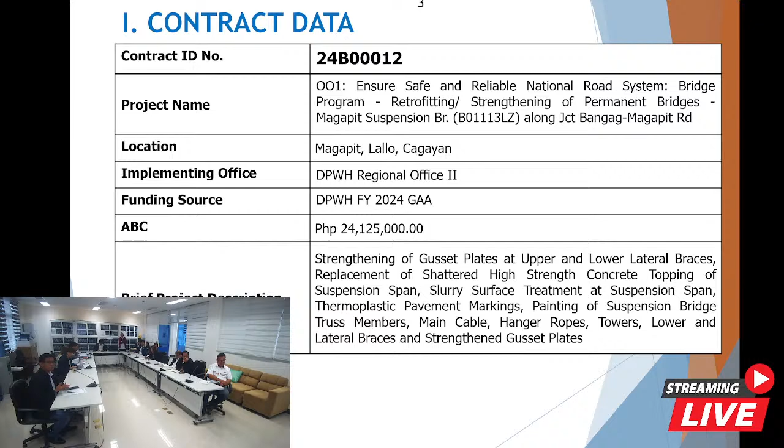As to the scope of works, for the facilities of the engineer, we have the provision on rental basis, the operation and maintenance of combined field, office, laboratory, and living quarters building for the engineer, provision of furniture, fixtures, equipment, and appliances for the field office of the engineer, provision on rental basis of 4x2 pickup type service vehicle of the engineer, and operation and maintenance of the 4x2 pickup type service vehicle of the engineer.

With regards to the other general requirements, we have the project billboard or signboard, occupational safety and health program, traffic management, mobilization and demobilization, and environmental management and monitoring. For the earthworks, we have the removal of structures and obstruction of steel, concrete, and other actual structures.

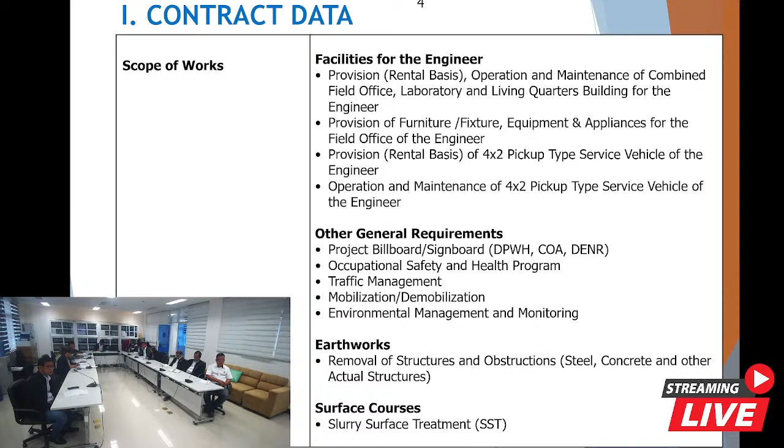For the surface courses, we have slurry surface treatment, or SST. For the bridge construction, the scope of work is furnishing, fabrication, erection of structural steel grade 36 and 50, painting of structural steel, bolts with nuts and washers, structural concrete, 41 megapascal non-shrink, and forms and false works. For the miscellaneous structures, we have the reflectorized thermoplastic pavement markings, white and yellow, and waterproofing on deck slab using epoxy base. The contract duration is 231 calendar days, inclusive of the net working days, predetermined unworkable days, Sundays, and holidays.

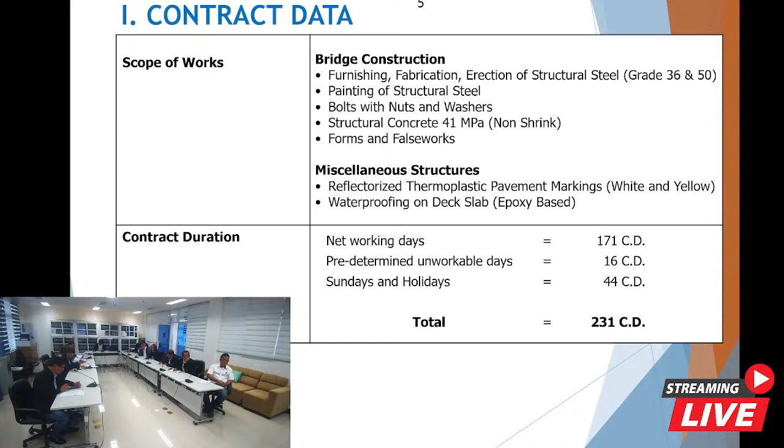As for the eligibility requirements, the PCAB license size range should be at least Small B. And for the SLCC, bidders should have completed a contract on major category of work with construction costs of at least 50% of the ABC, which is 12,062,500 pesos of the contract to be bid.

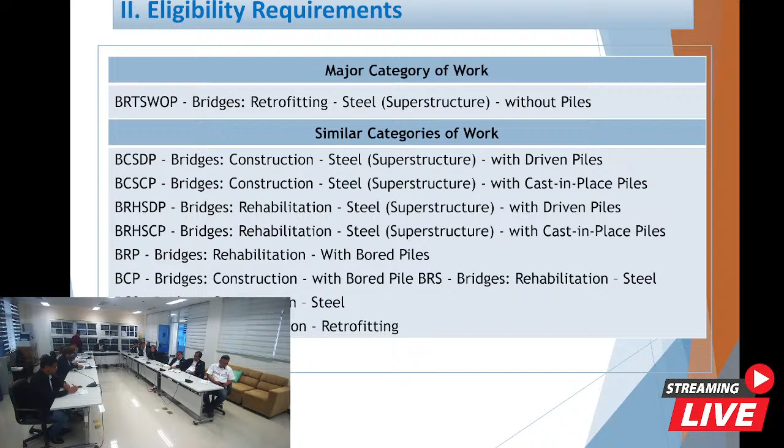For the eligibility requirements under major category of works: BRTSWOP, bridges retrofitting steel superstructure without piles. For similar categories of work: BCSDP, bridges construction steel superstructure with driven piles; BCSCP, bridges construction steel superstructure with cast-in-place piles; BRHSDP, bridges rehabilitation of steel superstructure with driven piles; BRHSCP, bridges rehabilitation of steel superstructure with cast-in-place piles; BRP, bridges rehabilitation with bored piles; BCP, bridges construction with bored piles; BRS, bridges rehabilitation steel; BCS, bridges construction of steel; BRR, bridges rehabilitation retrofitting.

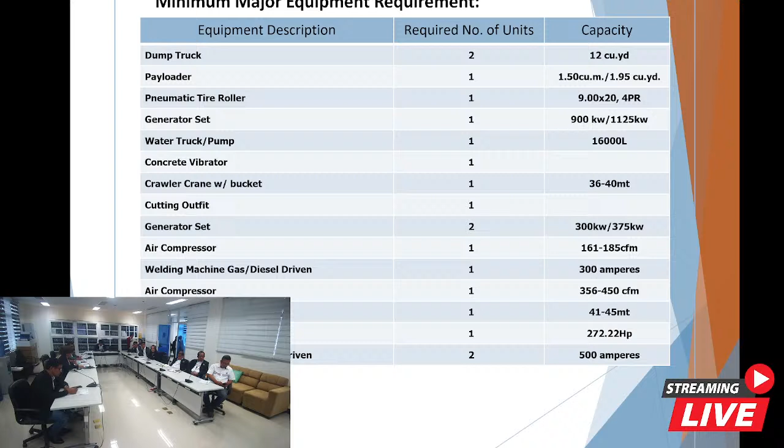For the project requirements, under the work experience requirements for the key personnel, please refer to the bid data sheet, as well as the minimum major equipment requirement. Please refer to the bid data sheet.

That's all, Vice Chair. Okay, thank you, Cecil. So, any question or point of clarification from the other members of the council?

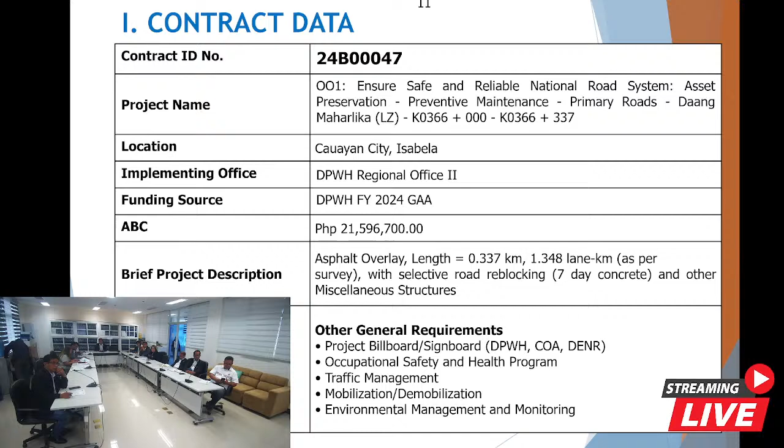For earthworks, we have removal of actual structures, obstruction, PCCP with a thickness of 0.23 meter and 0.30 meter, excavation, surplus common, and sub-grade preparation.

For sub-base and base course, we have aggregate base course, polymer stabilized sub-base, base surface course. For surface course, we have asphalt overlay, PCCP with a thickness of 0.3 meter, 7-day concrete.

For miscellaneous structures, we have signs, warning and traffic instruction, internally illuminated pavement level marker, stud flush type, bi-directional reflectorized thermoplastic pavement markings, white and yellow, structural concrete injection and crack repair.

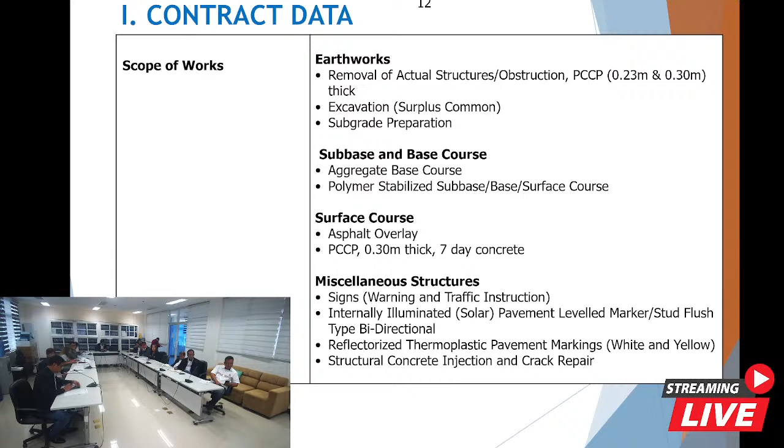For contract duration, with a total of 81 calendar days.

For the eligibility requirements, for PCAB license must be at least small B. For SLCC, bidder should have completed a contract on major category of works with a construction cost of at least 50% of the ABC, which is 10,798,350 pesos of the contract to be bid.

For the major category of work, RCA, roads construction asphalt. For similar categories of work, RRA, roads rehabilitation asphalt. For the project requirements, work experience requirements for the key personnel, please refer to the bid data sheet. Likewise with the minimum major equipment requirement.

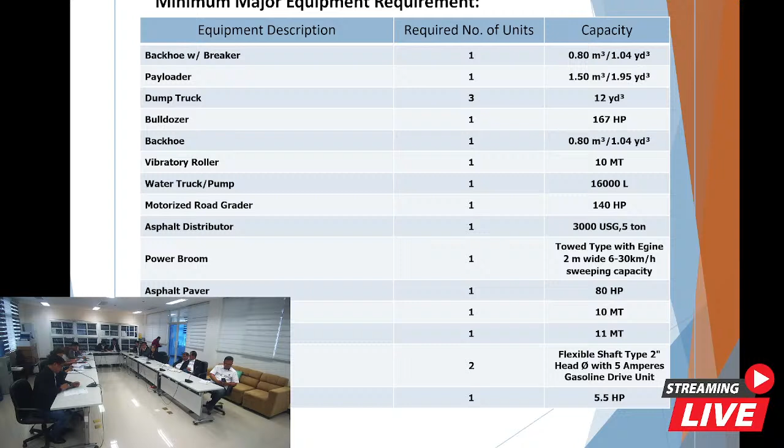That's all, Mr. Vice Chair. Okay, thank you, Ma'am Rose. Any question for that particular contract, 24B0047?

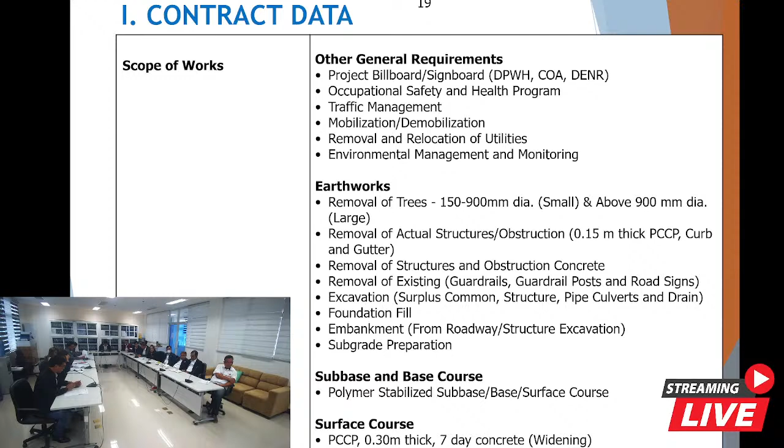Road bridge construction: reinforcing steel grade 60, structural concrete 20.68 megapascal for 14 days, structural concrete 27.58 megapascal for 28 days, reinforcing steel bars grade 40, lean concrete class B 16.5 megapascal.

For drainage and slope protection structures, we have pipe culvert class 4 RCPC with 910 mm diameter, 1,220 mm diameter, and 1,520 mm diameter. Metal frames and covers, metal frames and gratings, and grouted riprap, class A.

Miscellaneous structures cast in place, that is concrete curb and gutter. For signs, we have warning, regulatory, and traffic instruction signs. For hazard markers, that is chevron signs. For trees, furnishing and transplanting.

Reflectorized thermoplastic pavement markings for white and yellow, and reflectorized thermoplastic rumble strip.

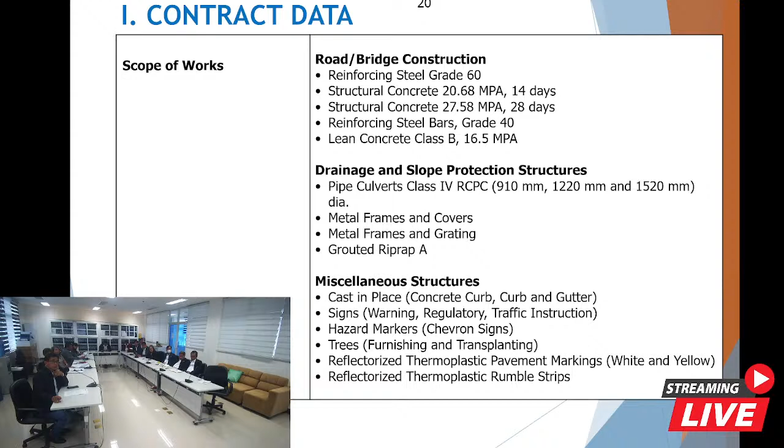The contract duration: net working days is 235 calendar days, predetermined unworkable days 22 calendar days, Sundays and holidays 60 days, for a total of 317 calendar days.

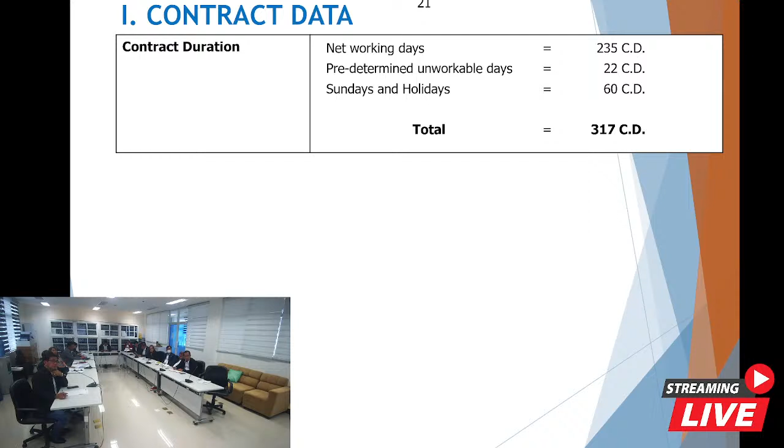PCAB license: required PCAB license is size range of at least Medium B.

As SLCC, bidders should have completed a contract with a major category of works with a construction cost of at least 50% of the ABC, or equivalent to 77,293,935.71 of the contract to be bid.

For the major category of works: RCP, roads construction, and PCCP. For similar categories of work: RRP, road rehabilitation, PCCP. RCTP, that is roads construction tunnel PCCP.

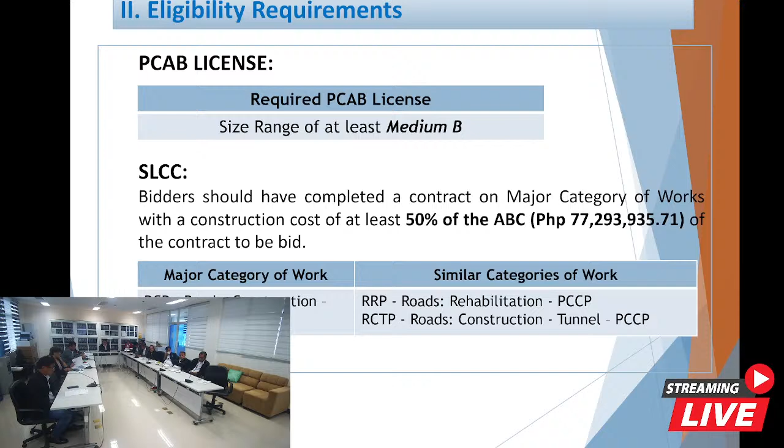For work experience requirements for the key personnel: for project manager, at least 5 minimum years of total work experience in position, and 5 minimum years of similar experience in position.

For project engineer, 5 minimum years of total work experience in position, and 3 minimum years of similar experience in position. For materials engineer, he must be an accredited materials engineer II.

For quantity engineer or surveyor, at least 3 minimum years of total work experience in position, and 2 minimum years of similar experience in position.

For foreman, at least 5 minimum years of total work experience in position, and 3 minimum years of similar experience in position. Safety officer must be accredited by DOLE.

Pollution control officer must have a certificate of training issued by an EMB recognized organization. Note: materials engineer's assignment must be compliant to DPWH Department Order Number 98, Series of 2016, revised guidelines on the accreditation of contractors' consultant materials engineer.

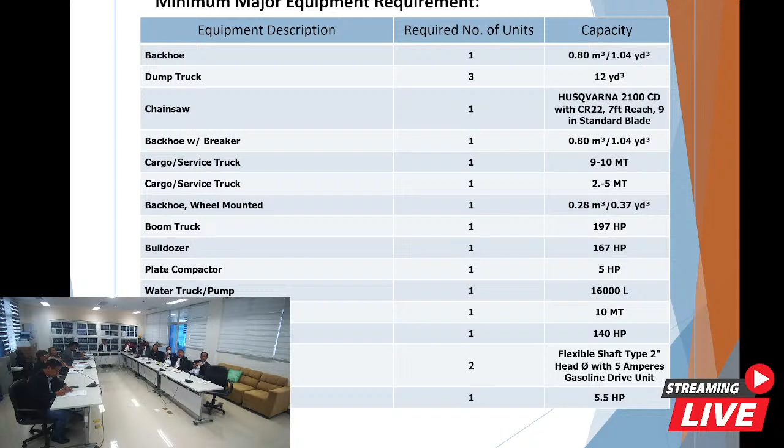For the minimum major equipment requirements, please refer to the bid data sheet. And the list of materials and equipment must be in accordance with Department Order Number 11, Series of 2017.

That's all, Vice Chair. Okay, thank you, Mr. Bernard. So, any question for that particular contract?

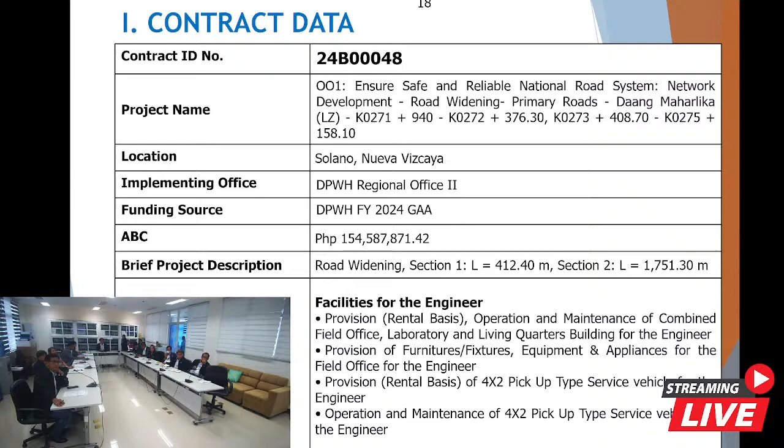So we have the provision for 4x2 pickup, this type pickup on rental basis. This is likewise brand new. Should be brand new.

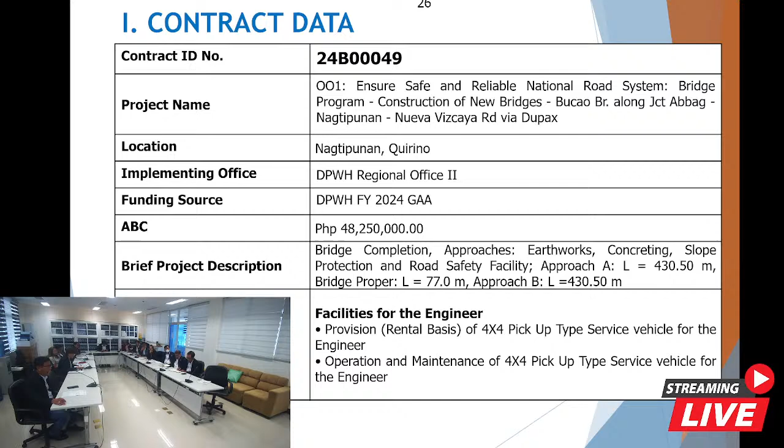With respect to the scope of work under the facilities of the engineer, there will be a provision on rental basis of a 4x4 pick-up type service vehicle for the engineer, and operation and maintenance of the 4x4 pick-up type service vehicle for the engineer. This is brand new, and it's 4x4 because it's located in a mountainous area.

For the items of work under the general requirements, we have project billboards and signboards for DPWH, COA, and DENR, occupational safety and health program, traffic management, mobilization and demobilization, and environmental management and monitoring. For earthworks, the items of work under this is the removal of actual structures and obstruction of PCCP and RCPC,

removal of structures and obstruction concrete, excavation of structures, foundation fill, shoring, cribbing, and related works, shoring, embankment from roadway, structure excavation and borrow, and sub-grade preparation. For sub-base and base course, we have aggregate sub-base course, while for surface courses, we have slurry surface treatment and PCCP of thickness 0.15 meters and 0.28 meters thick.

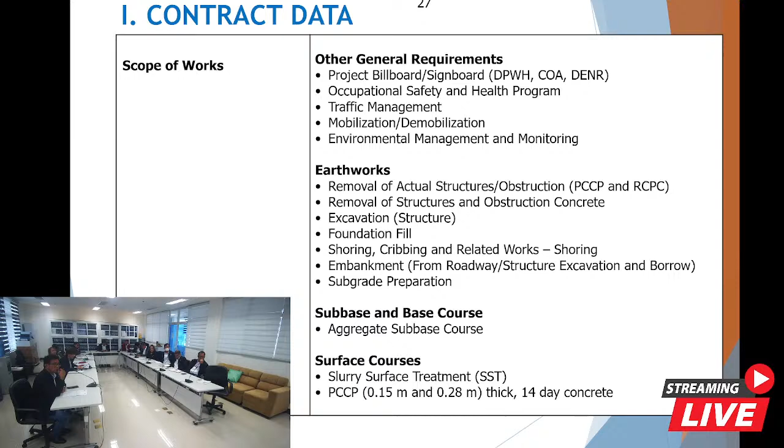It's a 14-day concrete. Under the roads and bridge construction, the items of work are concrete piles cast in drilled holes of 1.4 meter diameter, permanent casing 1.4 meter diameter 10 mm thick, concrete railing, pile integrity testing, low strain, high strain dynamic testing, bolts with nuts and washers, reinforcing steel grade 40 and 60 for bridge, structural concrete 20.68 megapascal class A 14 days, structural concrete 20.68 and 27.58 megapascals for class A 28 days, structural concrete, painting works,

reinforcing steel bars grade 40, clean concrete class B 16.5 megapascals, paint, pre-molded expansion joint filler with sealant of 12 mm. For drainage and slope protection structures, we have rubble concrete, hand laid rock embankment, drain pipe, galvanized.

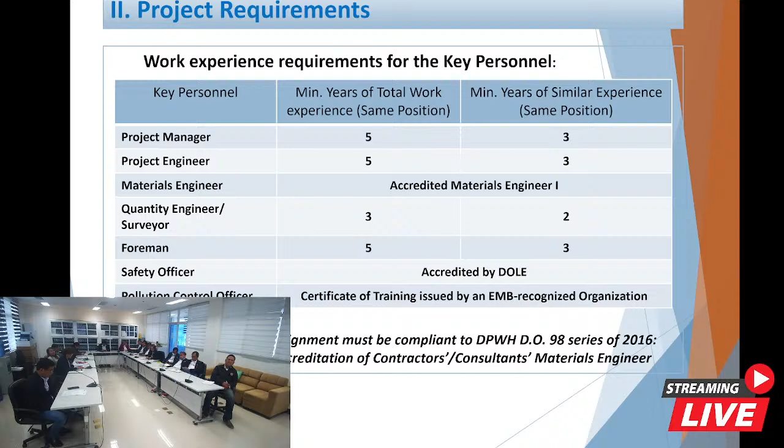As to the project requirements for the work experience, key personnel, and minimum major equipment requirements, please refer to the bid data sheet. That's all, sir. Okay, any question?

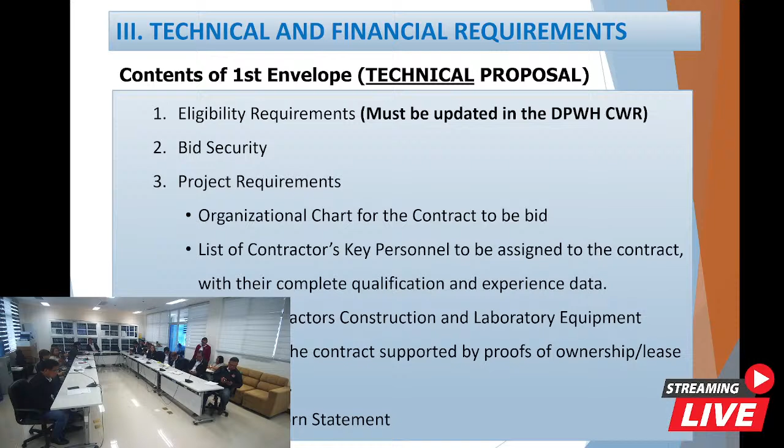Good morning everyone. For the technical and financial requirements, to be contained in the first envelope is the technical proposal, which includes the following documents: the eligibility requirements, which must be updated in the DPWH Civil Works Registry; the bid security; the project requirements, including the organizational chart for the contract to be bid; the list of contractor's key personnel to be assigned to the contract with their complete qualification and experience data; the list of contractor's construction and laboratory equipment pledged to the contract supported by proofs of ownership or lease agreement; and the omnibus sworn statement.

For registration in the DPWH Civil Works Application, if the bidder is not enrolled in the CWA, the bidder must submit its Class A and Class B documents, excluding the five Class A documents covered by the PhilGEPS Registration Certificate. On the other hand, if the bidder is enrolled in the CWA, it must update the pertinent documents in the CWA through the Contractor Profile Application on the DPWH website.

As to the bid security, the bid validity period and the bid security validity period shall be 120 calendar days from the date of submission of bids. The bid security shall include a bid securing declaration, or at least one other form which may be cash or a cashier's or manager's check issued by a universal or commercial bank, or a bank draft, guarantee, or irrevocable letter of credit issued by a universal or commercial bank equivalent to 2% of the ABC, or a surety bond callable on demand issued by a surety or insurance company duly certified by the Insurance Commission as authorized to issue such security, equivalent to 5% of the ABC.

For the second envelope, which shall contain the financial proposal, it should have the following documents: the bid form, which must be signed, indicating the total bid price and contract duration; the bill of quantities, also signed with bid prices; the detailed estimates, including a summary sheet indicating the unit prices of construction materials, labor rates, and equipment rentals used in coming up with the bid; and the cash flow by quarter and payment schedule.

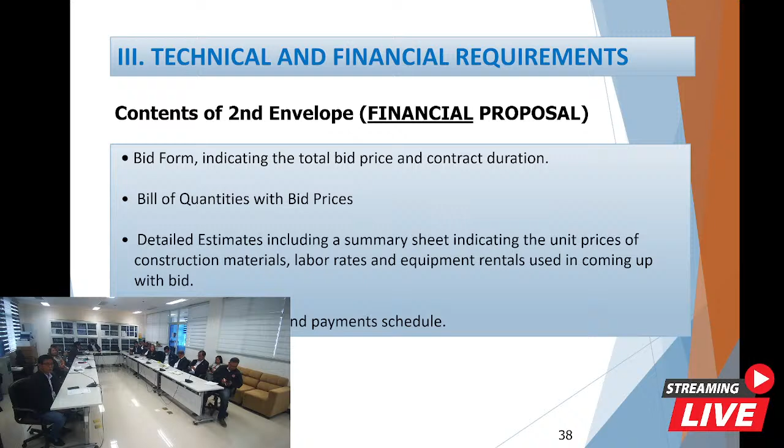During bid evaluation, the BAC shall evaluate the financial proposal using non-discretionary criteria, including arithmetical corrections for computational errors, and thus determine the correct total calculated bid price. The BAC shall automatically disqualify any total calculated bid price which exceeds the ABC.

The following factors are to be considered in the evaluation of the bid prices. As to completeness, if no price is given in a required item, it shall be considered non-complying. If indicating zero or a dash, it shall be free to the government. All prices are deemed to include all taxes. Bids not addressing or providing all of the required items in the bidding documents, including where applicable the BOQ, shall be considered non-responsive.

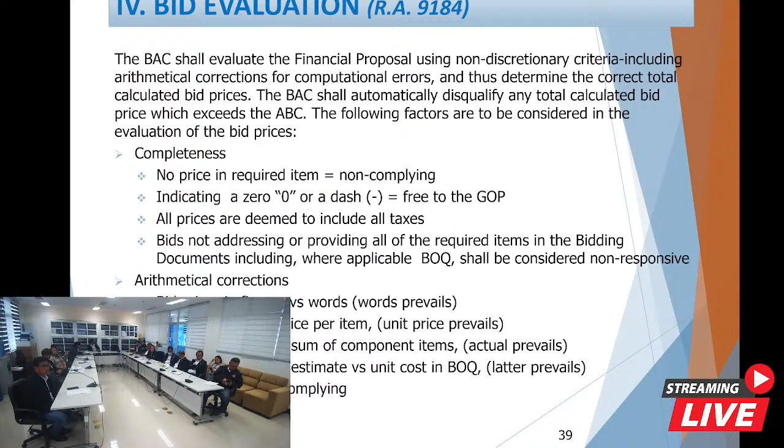As to arithmetical corrections, if there are conflicts between the bid price in figures and in words, the words shall prevail. Total price versus unit price per item, the unit price prevails. Total price versus actual sum of component items, the actual sum prevails. Unit cost in the detailed estimate versus unit cost in the BOQ, and again, if above the ABC, it shall be considered non-compliant.

During post-qualification, for RA 9184 and DPWH Department Orders number 127, series of 2018, and Department Order number 9, series of 2012, the verification of the legal requirements, including the licenses, certificates, and permits, will assert whether the bidder is included or not included in the blacklist of contractors provided by the DPWH and the GPPB.

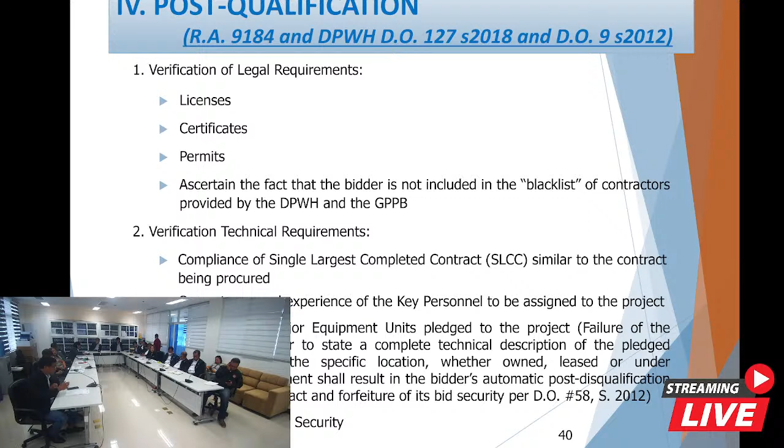Also, the verification of technical requirements: the compliance of single largest completed contract similar to the contract being procured, the competence and experience of the key personnel to be assigned to the project, and the availability of major equipment units pledged to the project. Take note that failure of the prospective bidder to state a complete technical description of the pledged equipment and its specific location, whether leased or under purchase agreement, shall result in the bidder's automatic post-disqualification for award of contract and forfeiture of its bid security per Department Order Number 58, Series of 2012, as well as verification of the authenticity of the bid security.

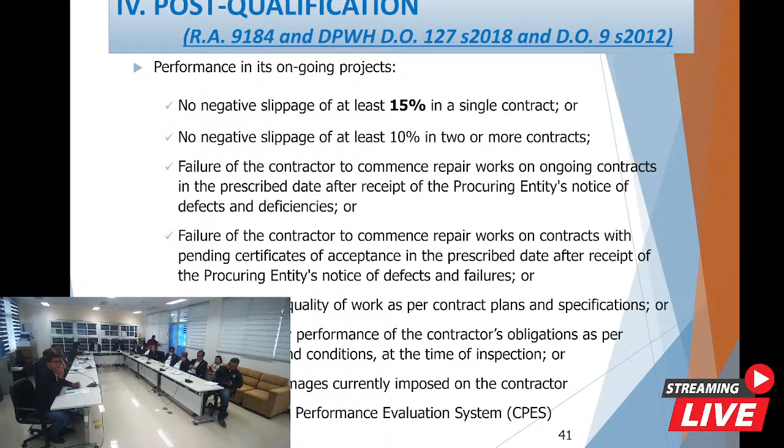Also during post-qualification, the performance of the contractor in its ongoing projects is reviewed: no negative slippage of at least 15% in a single contract, or no negative slippage of at least 10% in 2 or more contracts; failure of the contractor to commence repair works on ongoing contracts within the prescribed date after receipt of the procuring entity's notice of defects and deficiencies; or failure to commence repair works on contracts with pending certificates of acceptance within the prescribed date after receipt of notice of defects and failures; no substandard quality of work as per contract plans and specifications; no unsatisfactory performance of the contractor's obligations as per contract terms and conditions at the time of inspection; no liquidated damages currently imposed on the contractor; and the result of the contractor's performance evaluation system.

Per Department Order Number 9, Series of 2012, the requirements for civil works projects for public bidding state that if a proposed key technical personnel is an employee of the bidder and working on another project at the same time of the bidding, the bidder shall submit a certification that: first, the personnel will be pulled out from the ongoing project once the bidder is awarded the contract, and second, he or she will be replaced with another person with equal or better qualifications as certified by the head of the implementing office.

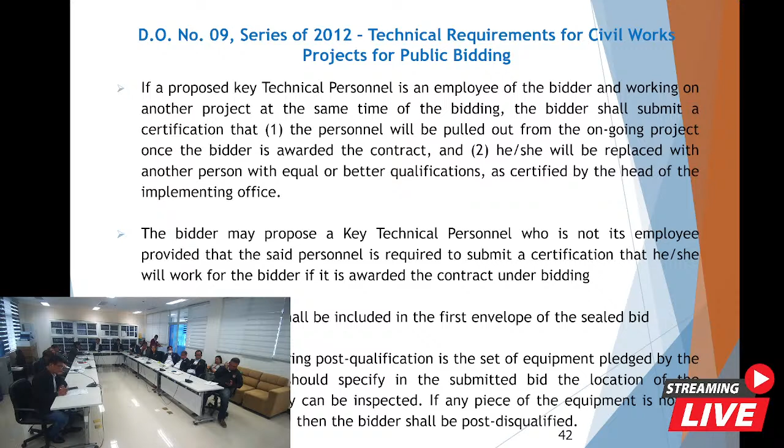The bidder may propose a technical person who is not its employee, provided that the said personnel submits a certification that he or she will work for the bidder if awarded the contract under bidding. This certification shall be included in the first envelope of the sealed bid and also verified during post-qualification, along with the equipment pledged by the bidder as mentioned earlier. The bidder should specify in the submitted bid the location of the equipment where it can be inspected. If any piece of equipment is not in the specified location, the bidder shall be disqualified.

Reminders for the date of submission of clarifications: it shall be 10 days before the submission of bids, which shall be on January 30, 2024 until 10 a.m. Manual submissions shall be at the Procurement Conference Room, 4th floor, DPWH Regional Office 2, Extension Building 2, Regional Government Center, Carig Sur, Tuguegarao City, Cagayan. Electronic submissions may be done through electronic bids at R2@dpwh.gov.ph.

For the number of copies of bid proposal, prospective bidders are required to submit 1 original copy sealed in an envelope. The date and place of opening of bids shall be on January 30, 2024 after the deadline of receipt of bids, at the Procurement Conference Room, 4th floor, DPWH Regional Office 2, Extension Building 2, Regional Government Center, Carig Sur, Tuguegarao City, Cagayan. Please note that bidding documents and plans may be downloaded from the PhilGEPS and DPWH website.

That's all, Mr. Vice Chair.